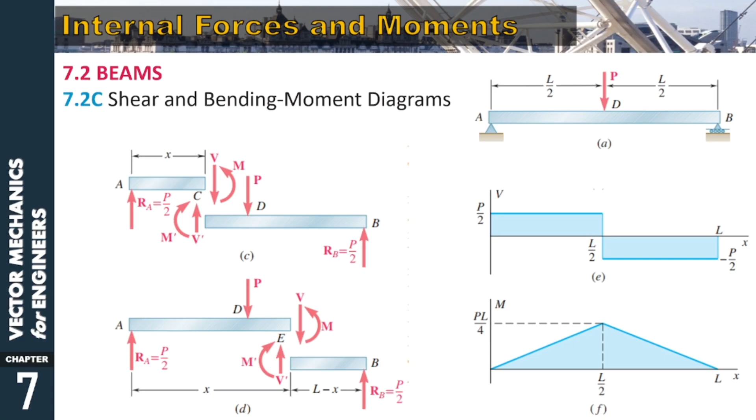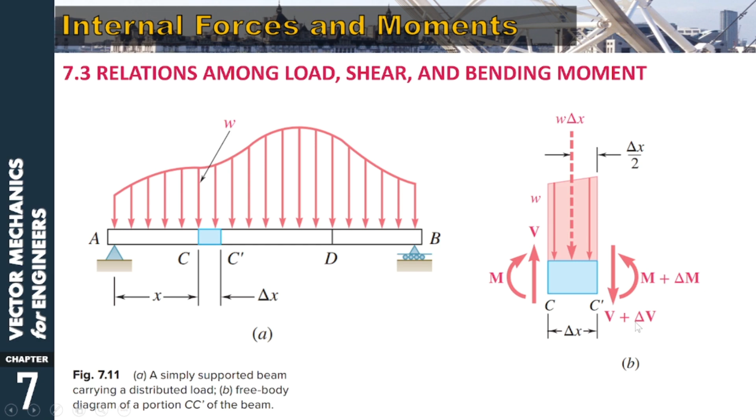The base is delta x, while its height is w. So the concentrated load replacing our distributed load would be W times delta X, applied at delta X over 2, or at the middle. Now look at the portion on the left side. Using our convention from the previous video, if we cut this portion, we have an upward shear and a clockwise moment. On the right side, we have a downward shear and counterclockwise moment, with values shear plus delta V and moment as M plus delta M.

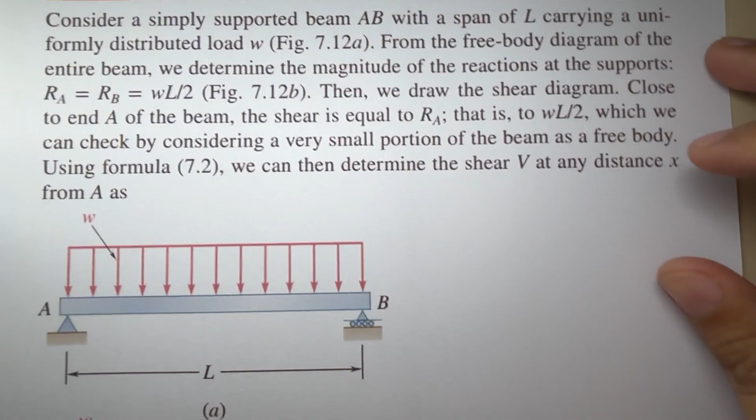Now let's have concept application 7.1. Consider a simply supported beam AB with a span of L carrying a uniformly distributed load W. From the free body diagram of the entire beam, we determine the magnitude of the reactions at the support.

Since due to symmetry, the uniformly distributed load applied on span AB creates an equal amount of reactions at points A and B. Since the total load equals the area of the distributed load, the total area of the distributed load is just W times L, which is base times height. Therefore, the reactions at the supports would be WL over 2, and WL over 2 at the other support.

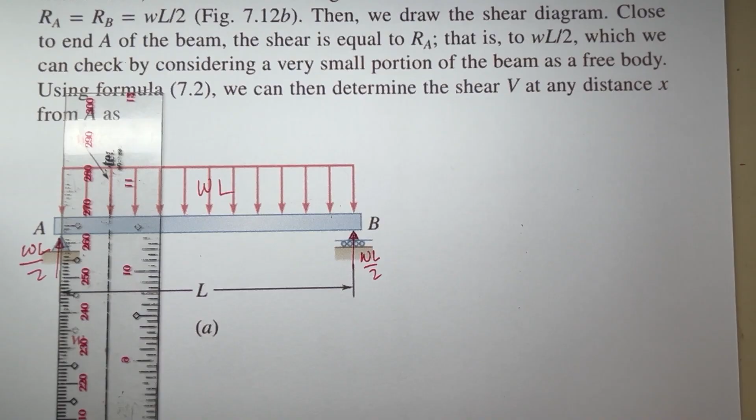Now we're ready to draw the shear and moment diagram. So in drawing the shear and moment diagram, let's recall our formula.

For drawing the shear diagram, we have our formula: V2 minus V1 is equal to the negative area under the load curve, LC. So if we start at point A, the shear at that point is WL over 2. Let's draw on our shear diagram: V, WL over 2. So somewhere, if this point is 0, from here up to WL over 2. So V2 minus V1, which is WL over 2, is equal to the negative area under the load curve.

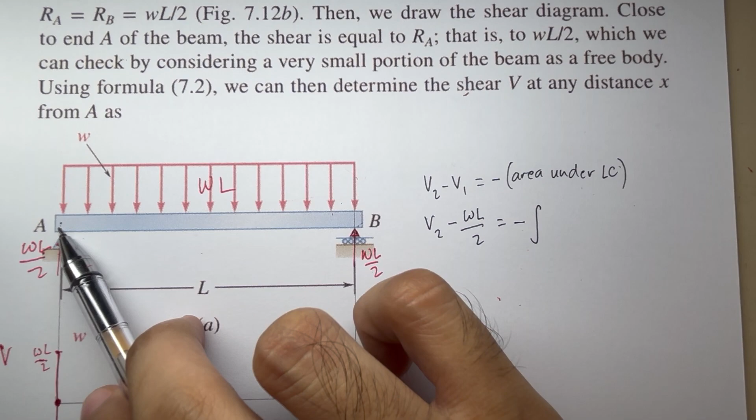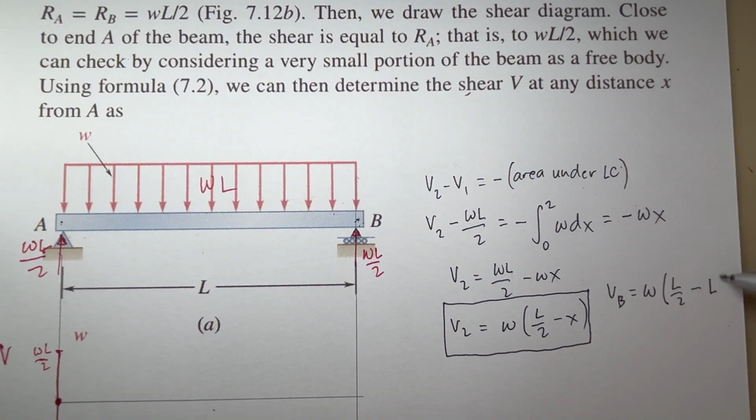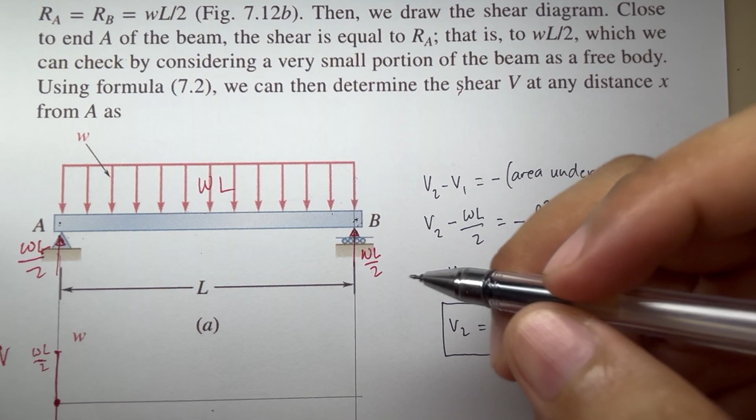So if you want to evaluate the shear at point B, we have VB is equal to W times L over 2 minus the value of x at point B, that is equal to L. So VB is just negative WL over 2. At point B, this point here, our V is basically this value, negative WL over 2.

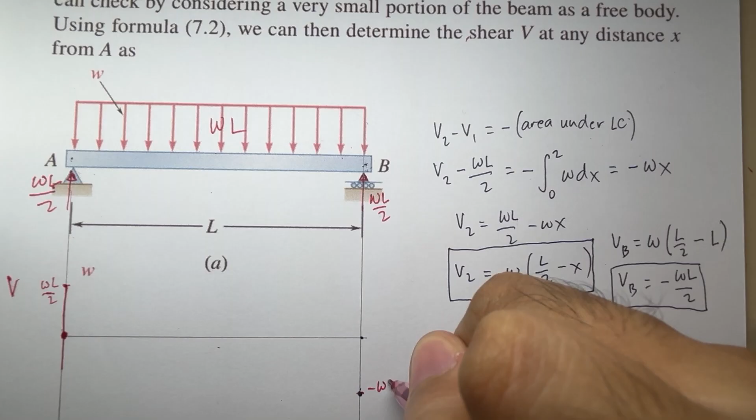Now at point B, we have a shear going upward, WL over 2. So from this point, going up, we go back to 0, because negative WL over 2 plus WL over 2 equals 0.

Now sir, how about the graph? What would be the graph here? Is it linear or is it quadratic? As you can see from our expression, the shear curve has x to the power of 1, so therefore our shear curve is linear.

So what do we need to create a line? We only need 2 points. Since we already have point 1 and point 2, and knowing that our shear curve is linear, our shear curve is just the line connecting the two points. Basically, this is our shear diagram.

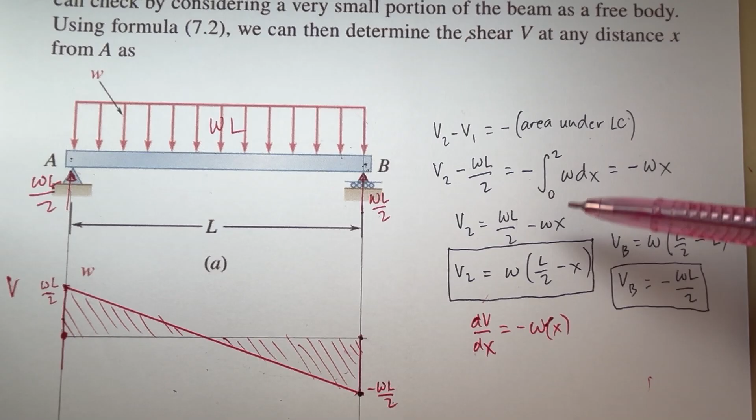From our expression, dV over dx is equal to negative W, where this W is in terms of x, or a function of x. So since dV over dx equals negative W, wherein W is a function of x, we can conclude that the function of our load curve has 1 degree lower than our shear curve, because dV over dx, the slope, is a point on our load curve.

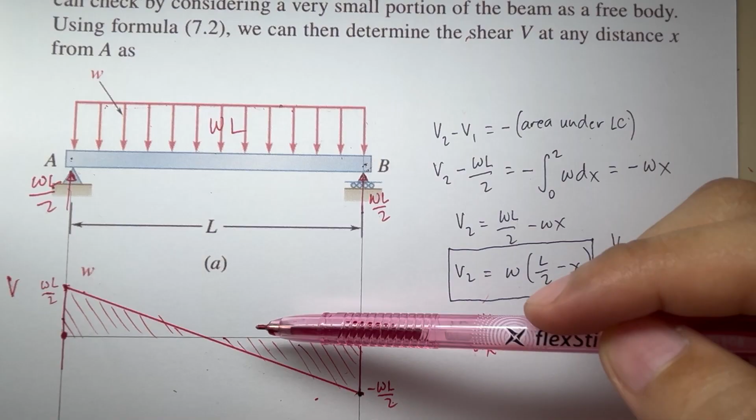So you can see that the load curve is constant. Then when we get to the shear curve, it's linear, because the load curve's x is to the power of 0 since it's constant, while here the x is to the power of 1. So we can conclude that the shear curve is 1 degree higher than our load curve.

The same applies to our bending moment curve. We have dM over dx is equal to V. As you can see, the slope at our bending moment diagram is just equal to a point in our shear curve. So therefore, our bending moment diagram is 1 degree higher than our shear curve.

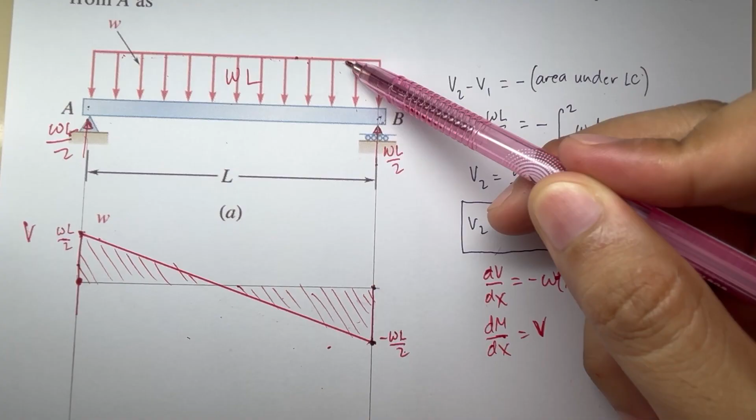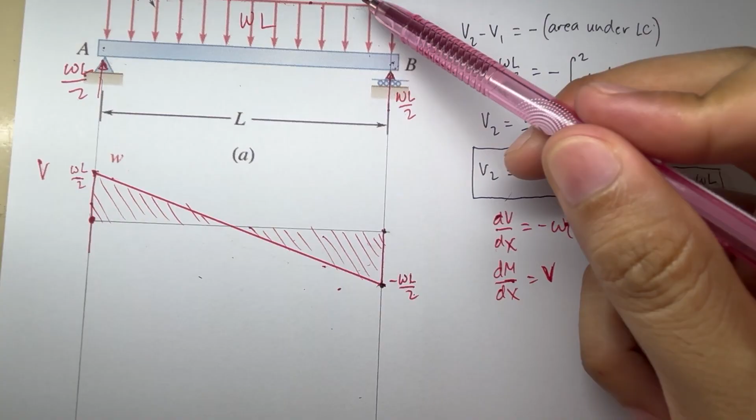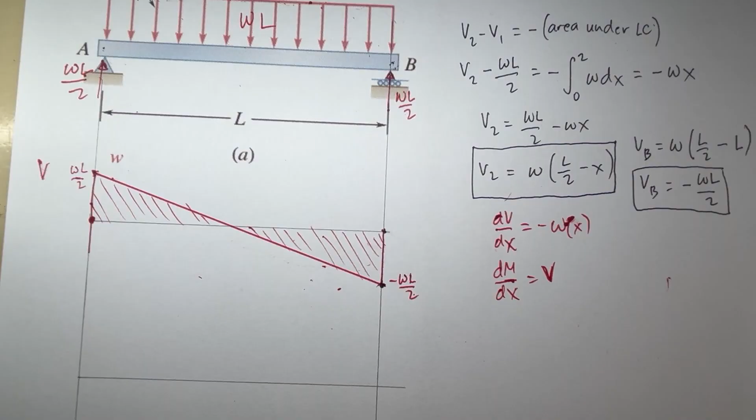So if this is constant, degree 0, then this becomes linear, degree 1. So since our moment is 1 degree higher than our shear, we expect that in our bending moment diagram it becomes quadratic next. So from here: constant, then linear, then for the moment, we have quadratic. Let's try to draw our moment diagram. The formula is M2 minus M1 is just equal to the area under the shear diagram.

At this point here, we have no moment. We only see shear here, right? So the moment at M1 is 0. This one here is 0. So therefore, M2 is just... what is this again?

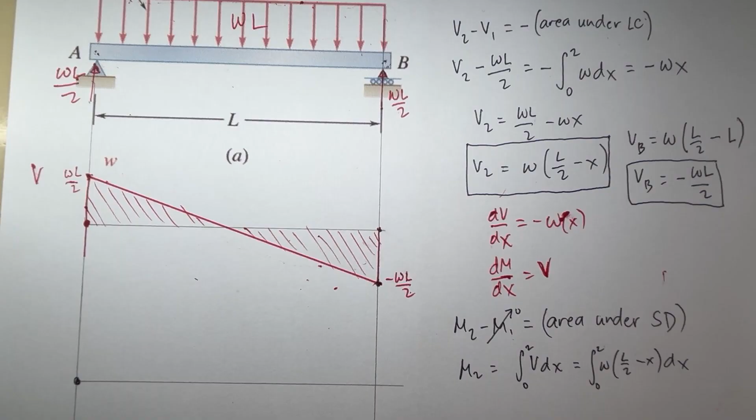Area under the shear diagram, that is the integral of v dx, from 0 to 2. So that is the integral of, what is our v? We have this one, w(L/2 minus x) dx, from 0 to 2, or from point 1 to point 2. So if we try to evaluate this one here, we have...

M2 is equal to W over 2 times (Lx minus x squared). So as you can see here, the moment in our moment diagram is to the power of 2, our x. So therefore, our moment diagram here is quadratic.

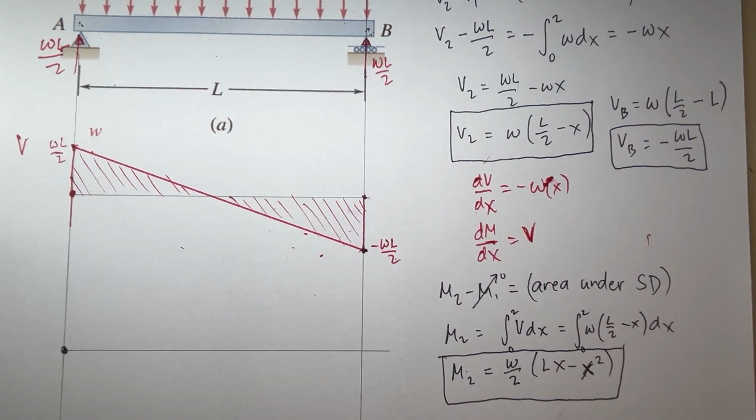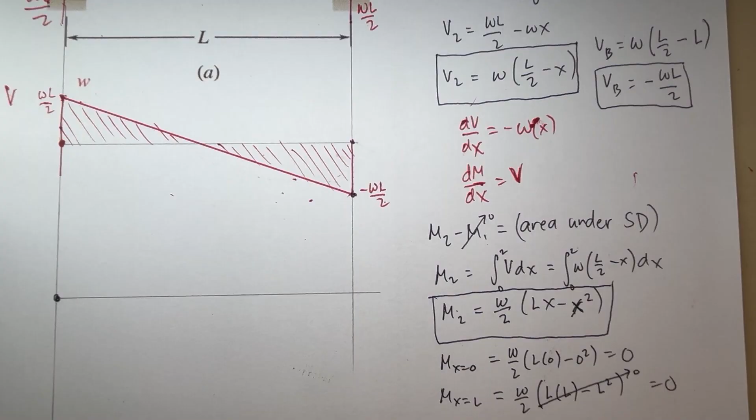So let's try to substitute. Say M at x is equal to 0. So we have here w over 2 L times (0 minus 0 squared), that is 0. How about at x is equal to L? We have w over 2 times (L times L minus L squared). So this one here becomes 0, so that is also 0. So at x is equal to L, that is at this point, our moment is also 0.

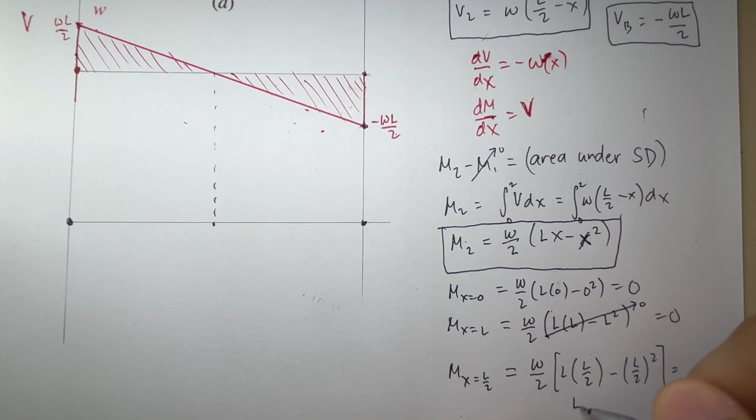How about at the half distance, L over 2? Let's try to solve. M at x is equal to L over 2. We have w over 2 times (L times L over 2 minus L over 2 squared). So we have here L squared over 2 minus L squared over 4. In that case, we have 1/2 minus 1/4 times 1/2. We have here L squared over 2 minus L squared over 4, omega over 2. This is 1/2 minus 1/4 times 1/2. We have 1/8 omega L squared. So at the half distance, our M is 1/8 WL squared. So somewhere, say this point, it's 1/8 omega L squared.

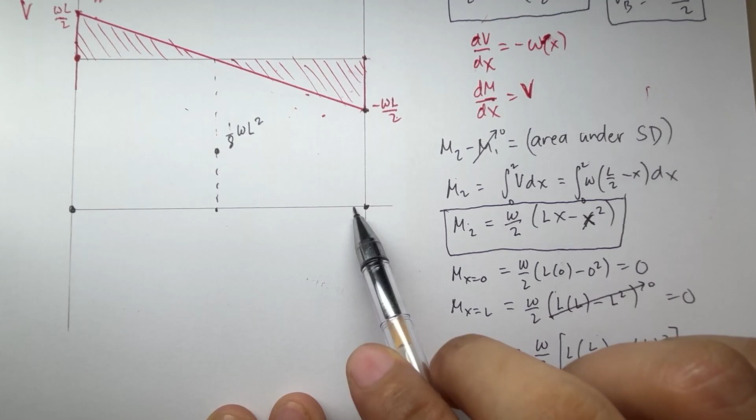Now knowing that this curve here is a parabola, we can just simply connect these 3 points here, right? So the curve would somehow look like this one. Yan, and then, yan. So this would be the bending moment diagram.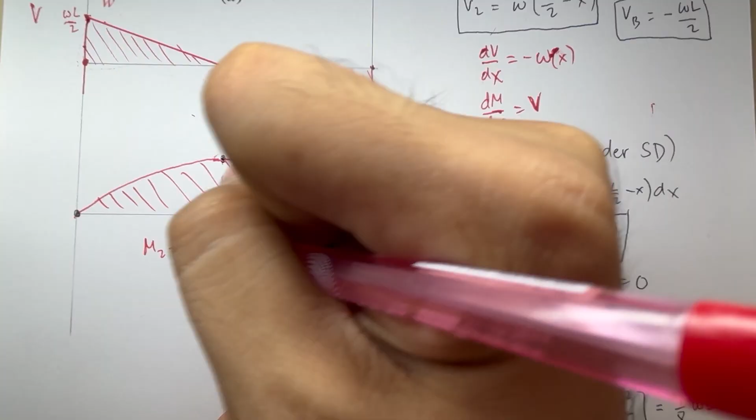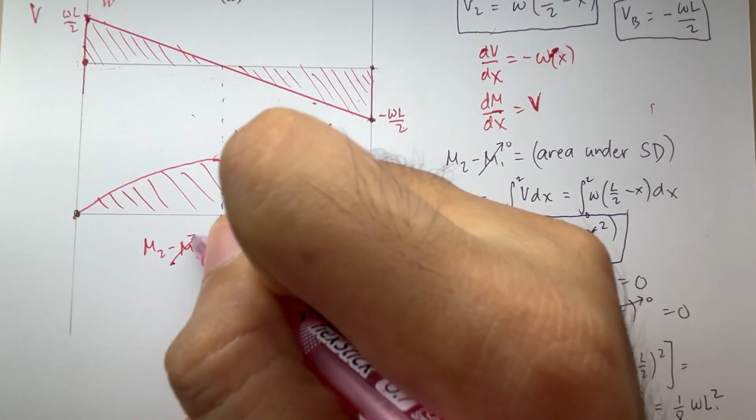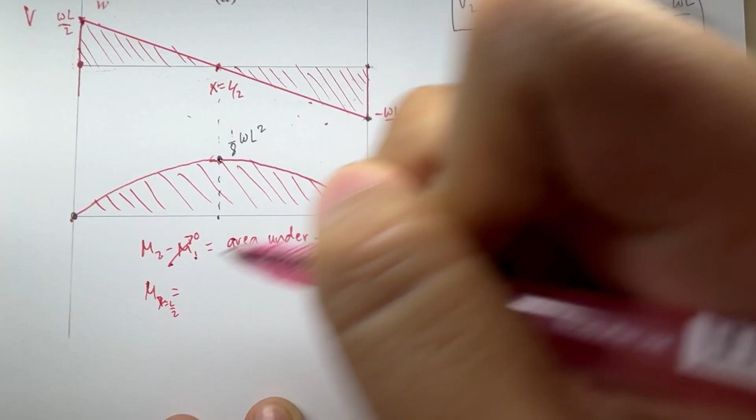Another way to evaluate the moment at this point here is to look at the area of our shear curve. We have a formula that M2 minus M1 is just equal to the area under the shear diagram. Say if our M1 here we know is 0, and then our M2 is at this point here, at x is equal to L over 2. Let's just substitute. We have M2 is just equal to the area under the shear diagram. So since we're evaluating this point at x is equal to L over 2, let's substitute. So what is the area under the shear diagram? The area here is a triangle, right?

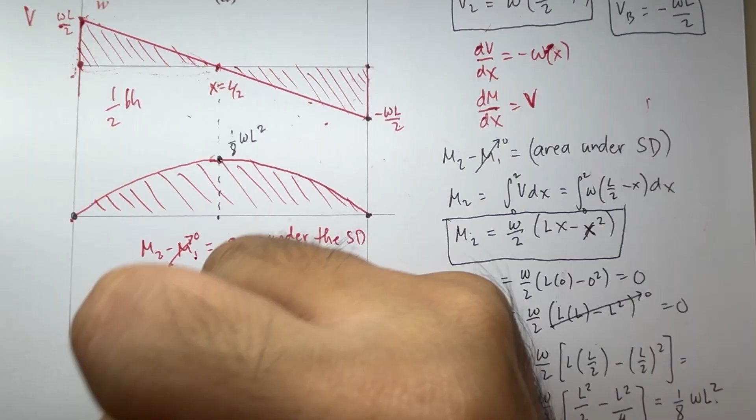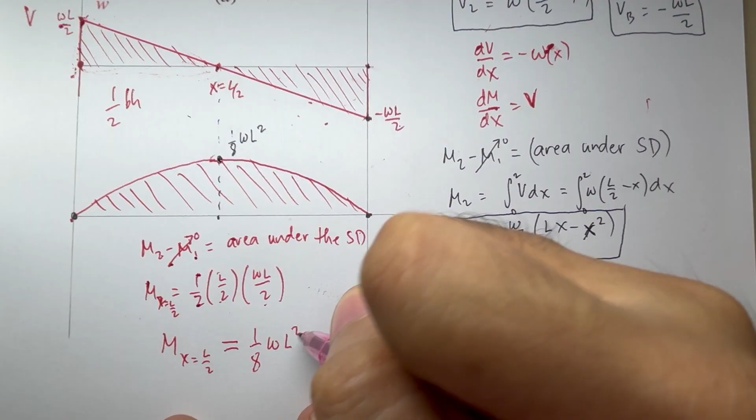So what is the area of a triangle? We have 1/2 base times height. So that is equal to 1/2. What is our base? The base is L over 2. And what is our height? The height is WL over 2. So we have WL over 2. Therefore, the M at x is equal to L over 2 is just equal to 1/2 times 1/2 times 1/2. We have 1 over 8. 2 times 2 times 2 is 8. WL squared. So instead of using this formula here, we can safely say, using this expression, that M at x is equal to L over 2, that is equal to 1/8 WL squared.

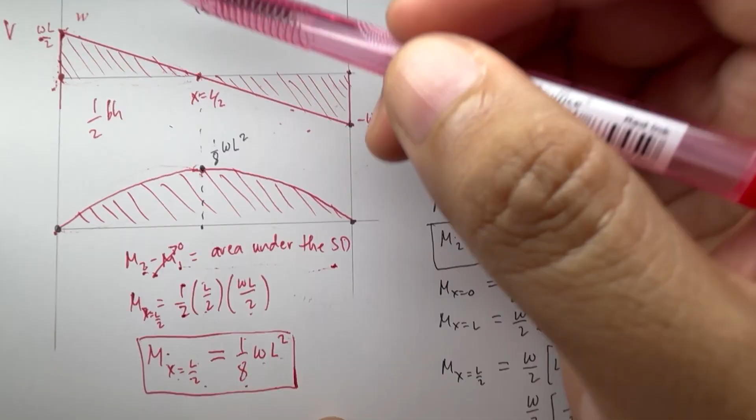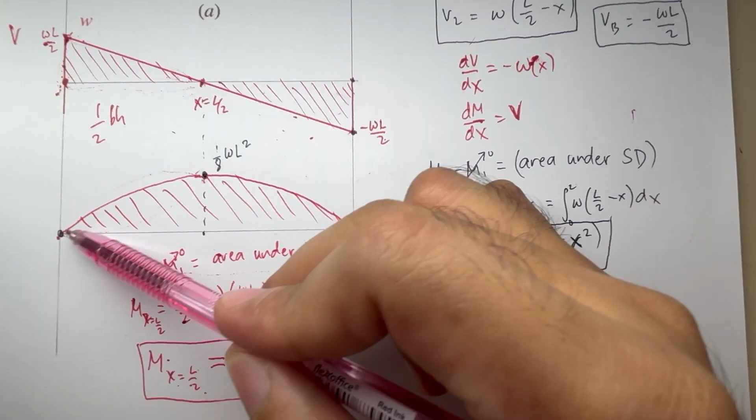So we have two methods here. If this is the one I'll use, I won't know if the curve here is concave up or concave downward. So here you'll see it: if our slope here, or our shear diagram here, is decreasing, the graph in our moment diagram would be frowning, or concave downward. So one way to remember this one here is...